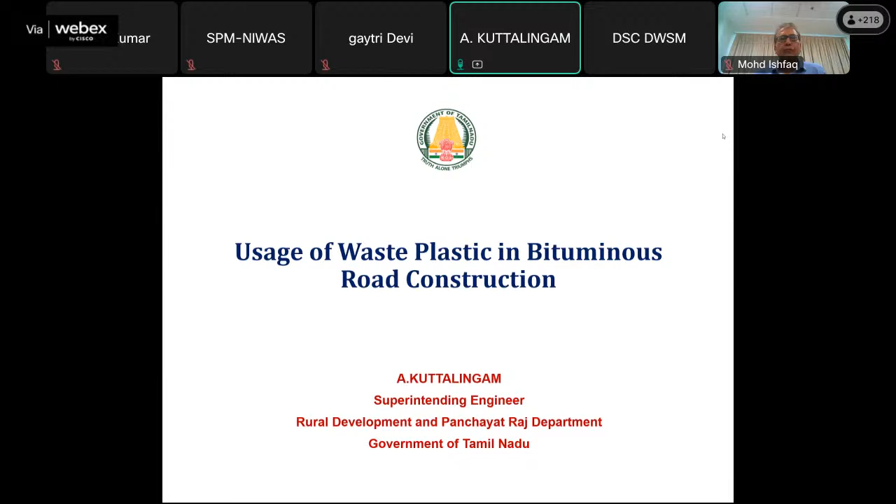You can run the PPT from here if he's facing problem. Yes, it should start, sir, immediately. Then you can run the PPT, sir. No issue, sir. Vinay, you have the PPT, you can run it. I think he's facing some issues with that. No issue, sir. Okay, please run it. Yes, sorry sir, it's running now.

Nowadays we are facing the problem because of plastic waste, because we are mostly using all kinds of plastics, but how to handle it is the challenge for us. Currently in India, the total plastic waste generation is around 9.4 million tons per annum, out of which 26,000 tons of waste plastics are generated per day. Around 7,800 tons of plastics are a challenge for the environment that we have to make for another use.

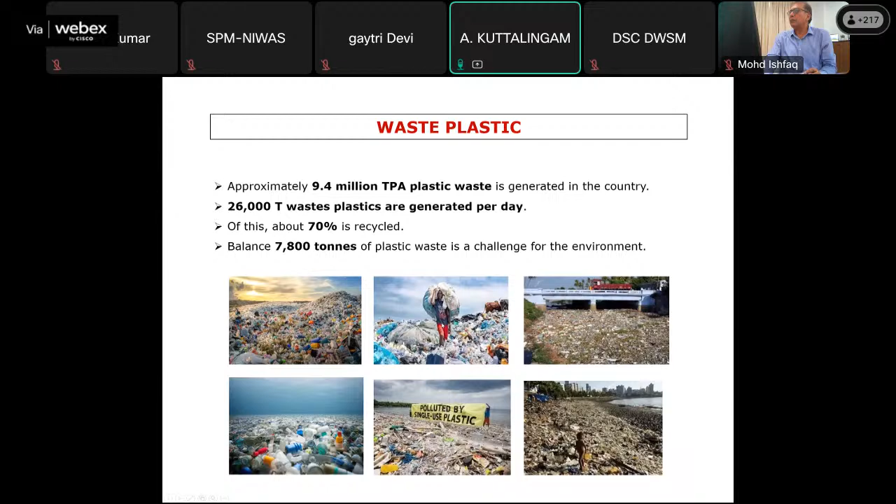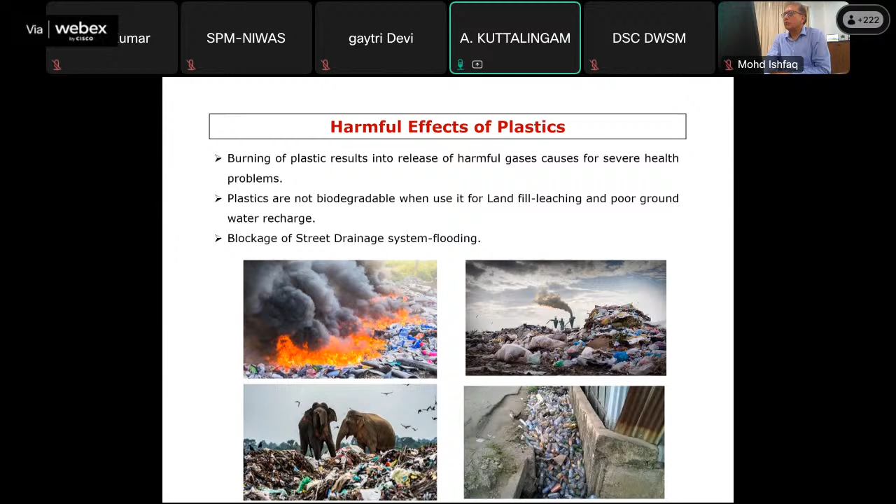These are the problems because of plastic. Nowadays we are throwing all the plastic away, so sanitation workers collect and dump it wherever lands are available. So when we burn it, carbon emission will happen, air pollution will happen, and land pollution will happen, and animals will eat it and it becomes a problem for their life. When they throw it away, it will block the drainages, so during monsoon season some flooding will happen due to the blocking of the drainages.

In Tamil Nadu, our department has set up the SBM in a good profile. Total rural population is around 4.69 crore, 37 districts, 388 blocks, 12,525 panchayats, and around 79,000 habitations. So in our state, the SBM wing is functioning well.

As per present SBM norms, there is a provision for establishing plastic waste management units at rural areas. Currently, out of 388 blocks, we have established around 322 plastic waste management units.

As per SBM guidelines, there is a funding provision of up to 16 lakhs that can be spent out of the SBM-G funding. From SBM-G, we have established some micro composting centers. In the micro composting center, we induce the wet waste to compost, so that we can process it and convert it into compost for agriculture and other purposes.

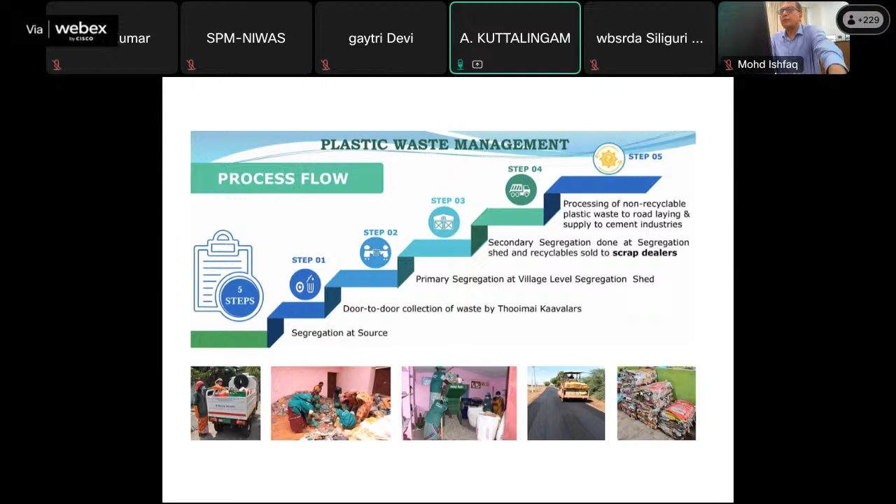For plastic waste management, initially we have the Thooimai Kaavalars, the door-to-door collectors. The Thooimai Kaavalars are paid around 5,000 rupees monthly. They go and collect door-to-door, segregating from the doorstep itself. Even then, some challenges are faced by the sanitary workers. They bring it to the segregation shed and segregate the entire thing, then use it for another plastic waste management unit.

There are machines we have purchased, and from those machines we process it for recyclable and other usages.

So in plastic waste, there are 7 types of plastic. Polyethylene PET, having a melting temperature of around 250 to 260 degrees. High density polyethylene HDPE has melting temperature of around 120 to 130 degrees centigrade. PVC has melting temperature around 100 to 260 degrees. Low density polyethylene, LDPE, has melting temperature of 105 to 115. Polypropylene's melting temperature is around 130 to 171. Polystyrene PS has a melting temperature of 210 to 240.

So which kind of plastic can be used or recycled? Based on the property of each kind of plastic, that is the matter we have to understand before going for recycling or reprocessing. That is the important thing. Based on that, during segregation, we have to create awareness among the sanitary workers to segregate the waste plastic accordingly, so that it can be appropriately used for recycling or reprocessing.

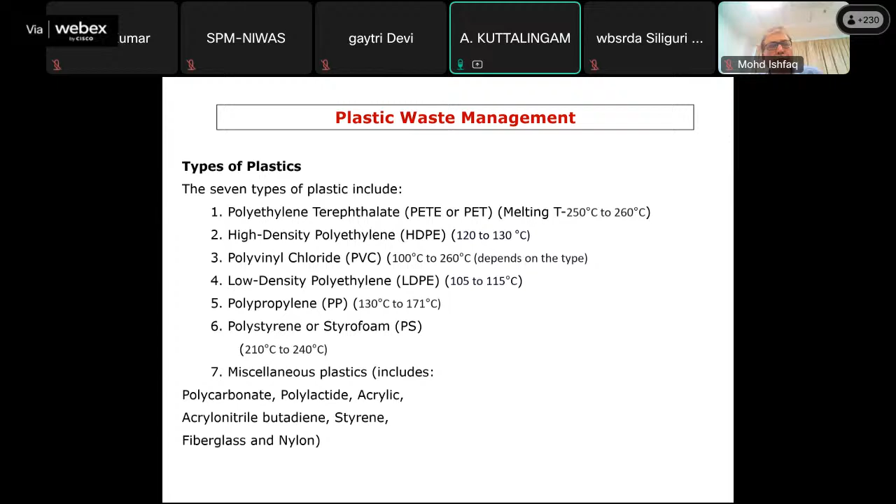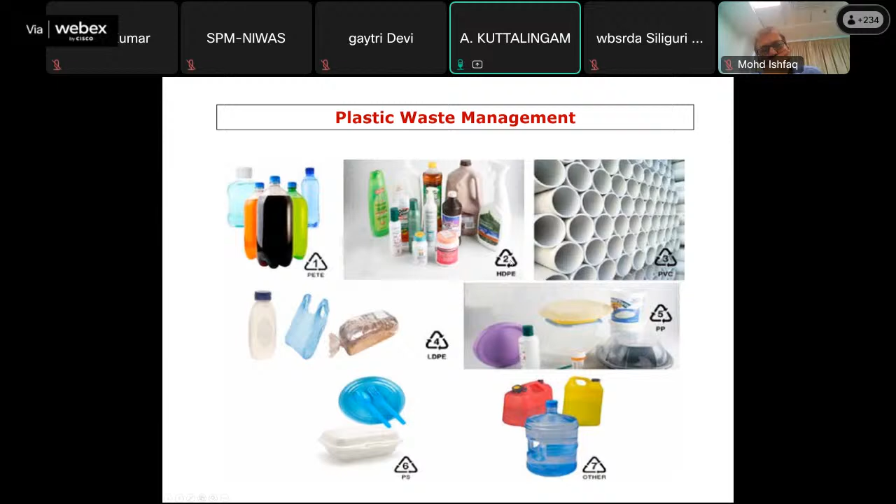So these are the plastic wastes, the images showing PET and other things. For road construction, we can only use LDPE and HDPE. Mostly in Tamil Nadu, HDPE is not used because segregation is very difficult, so we are using only LDPE. LDPE is nothing but plastic - examples are plastic wrapper and carry bag, sandwich bag, bread bag, bubble wrapper, garbage bag, grocery bag, and beverage cups. These all come under LDPE.

And HDPE - plastic bottles, milk jugs, shampoo bottles, bleach bottles, cutting boards, and piping. These kinds of things are very difficult to shred, so we are not using this kind of plastic for road construction. Only LDPE we are using. So for LDPE, there is a guideline in the IRC manual.

So there are 2 kinds of processes by which we can reuse waste plastic. One is the features - there is a rule called the Plastic Waste Management Rule 2016.

In that, the waste generator has the responsibility to segregate waste plastic and hand it over to the authorized agency, that is the sanitary worker, and to pay the user fees for processing all the waste. The local body shall have the responsibility for setting up plastic waste management, which is eligible under SBMG guidelines, and encourage the use of plastic waste for road construction, energy recovery, waste to oil, or other co-processing in the cement kiln unit. So these are the processes available.

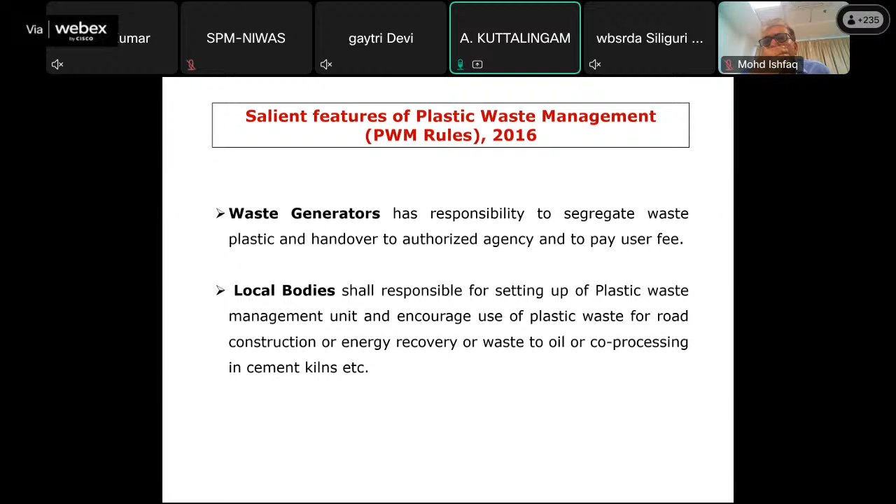As per SBMG, there is a provision for 16 lakh. Funds can be utilized from the SBMG guidelines. We can establish units wherever waste plastics are coming in more, and use it for other kinds of reprocessing. The plastic waste collected by the Thooimai Kaavalar and sanitary worker SHG members is segregated and weighed and used for this.

In Tamil Nadu, we have piloted a plastic buyback policy in a few select panchayats, with the interest of the panchayat and the panchayat sarpanch. They introduced that if people segregate and collect the plastic waste and bring it to the plastic waste management unit, they will get around 10 rupees for it. So by this way, we are encouraging people to segregate all kinds of plastic waste. Now we are processing to escalate this into entire Tamil Nadu. That initiation has been taken.

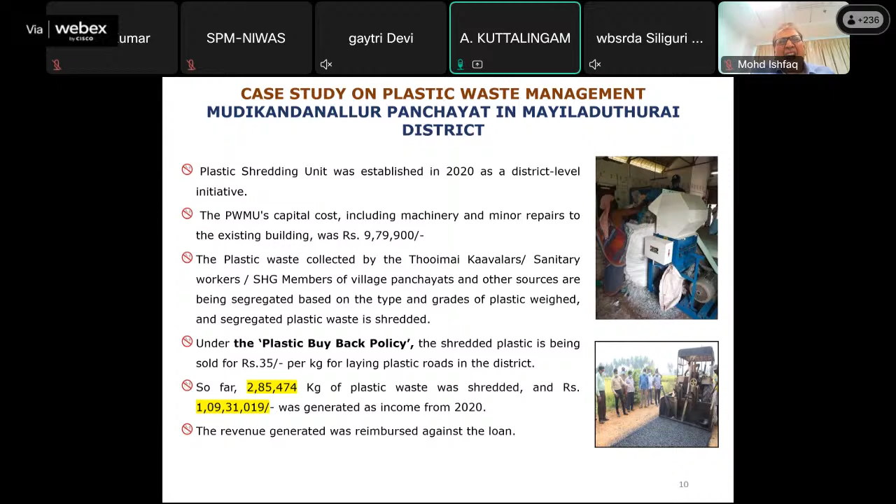So slowly we are inculcating the habit of segregating waste plastic and handling plastic waste at the household level and at the community level itself. So far, since 2020, we have established many plastic waste management units. Around 285 metric tons of plastic waste has been shredded in these units, from which they have generated around 1 crore in money. This money has been reimbursed for the loan for establishing the plastic waste management unit, over and above the 16 lakh, by the SHG members, and they will earn other income from that.

These are the kind of machines: the plastic shredder, having the capacity of around 100 to 125 kg per hour, costs about 5.4 lakhs. And a dust remover, because normally we throw away plastic in the open area, so it will mingle with dust, sand and other things, so it has to be removed.

As per IRC guidelines, only less than 1% dust is allowed for use in road construction. So to enable that, we have to remove all dust from the plastic waste collected from the local area. So the dust remover machinery has been established in the plastic waste management unit.

Another baling unit is used where other kinds of plastic cannot be used for road construction. They shrink the volume of that plastic, tag it, and give it to the cement kiln industries. There's also a weighing balance, essential for buying and selling. All this equipment can be purchased within the allowable amount of 16 lakhs.

So every district can establish one plastic waste management unit with the help of this SBM-G facility. So it will slowly...

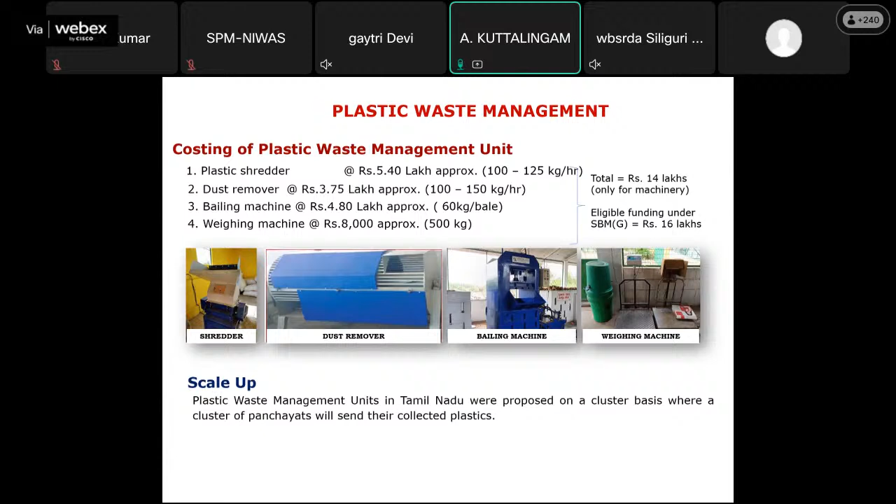Similarly, in rural areas also we are initiating this. So now people are slowly being educated that plastic waste has to be properly disposed of. They segregate it in the household itself and give it to the sanitary worker on a weekly basis.

Currently, around 322 plastic waste management units have been established, along with a buyback policy and other things. So far, we have established this.

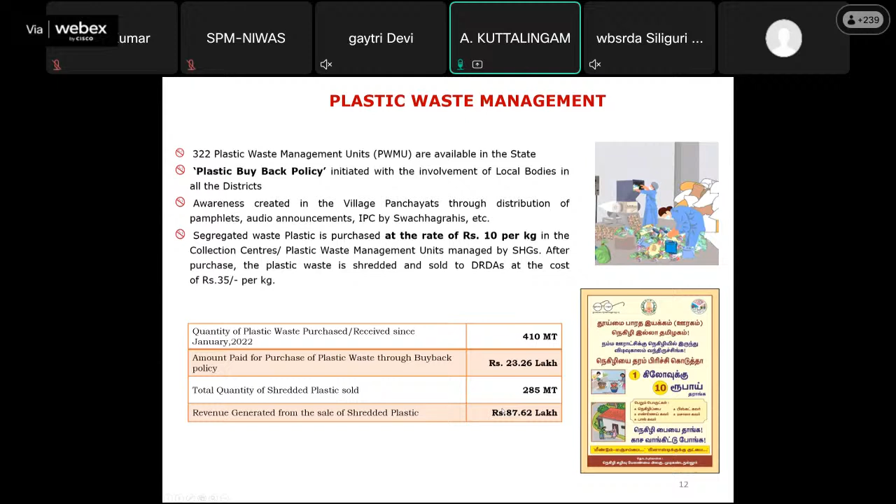For the LDPE plastic waste, the initiation to use it into road construction happened during 2002 itself, by Professor Dr. Vasudevan from Thiyagarajar College of Engineering. He is a pioneer for this plastic waste into road construction technology. At that time he decided, and on a pilot basis, initiated the process.

At that time, around 10% of the weight of the bitumen was replaced by plastic waste. So they used around 10%, and by experiencing that up to 2012, we were escalating the use of plastic waste in road construction in a piecemeal manner. Based on studies, the IRC conducted several studies from all over the country, including Tamil Nadu, and during 2013 they released a code for road construction using waste plastic.

PVC and these kinds of plastic should not be used because their melting temperature is more than the aggregate heating temperature, so it cannot be used.

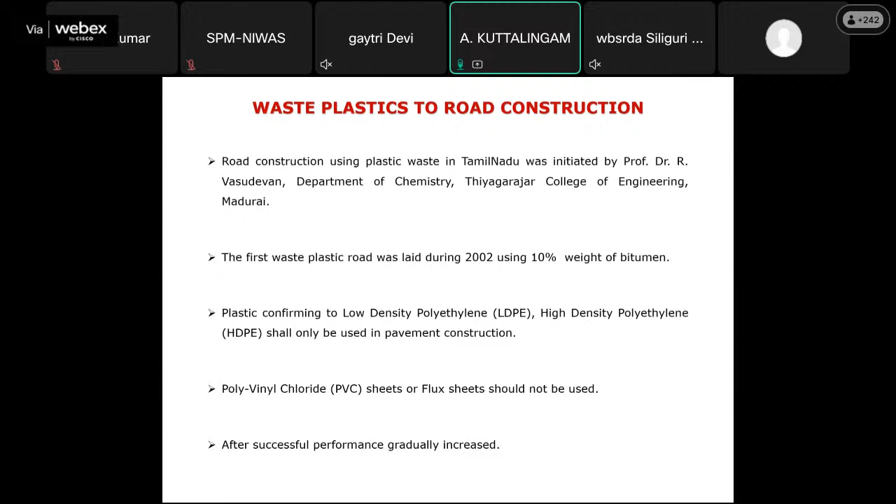During 2013, the IRC released guidelines for the use of waste plastic in bituminous road construction as a dry process. There are two processes available: dry process and wet process. For the wet process, study is going on, but it is not yet finalized.

So as per the IRC code that is available, the IRC did so many trials and errors. So now we are inculcating the use of waste plastic for road construction using only the dry process.

As per road construction requirements, this LDPE waste plastic has to have all dust removed, and it has to be shredded in the shredding machine, into a size of 2.36 mm down to 600 micron size. So the plastic has to be shredded into this size.

This size is essential because we use 20 mm metal and less for road construction. If the plastic is shredded to a larger size, it will not mingle well with the entire piece and part of the metal. So the IRC has recommended only 2.36 mm to 600 micron size of plastic, and the machine is equipped for that.

The shredded plastic from the shredding machine comes out around this size, and dust and impurities should not be there, because we are using bitumen. When dust and other impurities are more than 1%, it affects the binding property and viscosity of the bitumen, so the quality of road construction will be defeated. For that reason, the IRC recommends that dust should not be more than 1%, and for that purpose we use the dust remover in the plastic waste management unit.

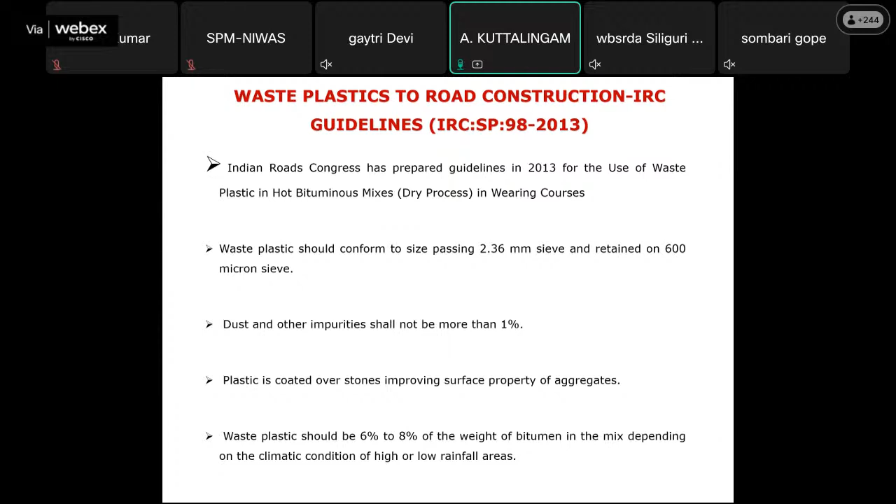of the bituminous road. As per IRC, it is recommended that 6 to 8%. Initially on trial, we were using only 10% of the waste plastic for which the bitumen is used. So currently, as per IRC, after various trial and error, they have suggested 6 to 8%. Currently, we are using around 7 to 8% in our road construction. In Tamil Nadu, we are using 6% and 8% according to the rainfall of the locality where the road is to be constructed. As I said, there are two processes, dry process and wet process.

Dry process is the cheaper one because we can directly heat the plastic along with the heated aggregate. It will coat over it. For wet process, any kind of plastic can be used. In that, one negative thing is there. When you use different varieties of plastic for wet process, each variety of plastic will have a different melting temperature.

So when the bitumen is heated to 170 degrees, at that time some plastic will burn. By that way carbon emission will happen, and again the environment will be polluted. And this kind of wet process has another property: the expense is more. So we are not recommending the wet process as of now.

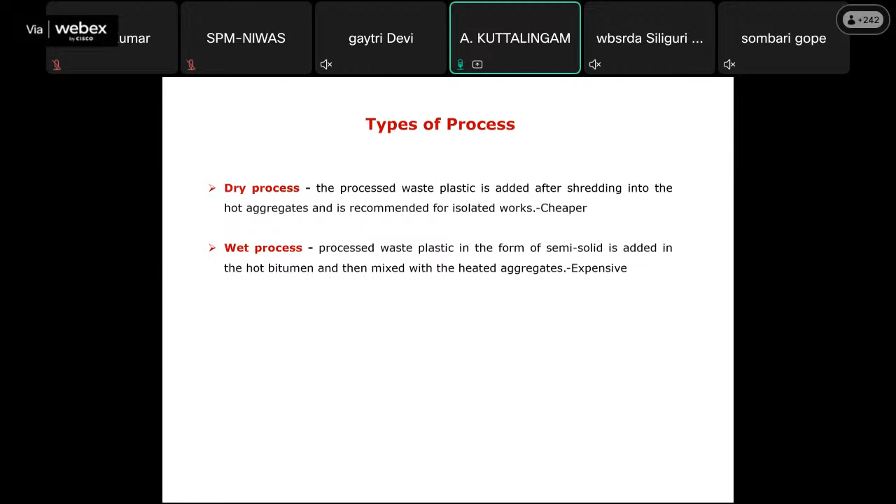So whenever road construction starts, in our Tamil Nadu, we have issued an SOP and circular that for every road construction, wherever there is a provision for use of waste plastic, the contractor has to buy the shredded waste plastic only from the plastic waste management unit established in the government center where the SHG is running it. So by this circular, we are encouraging the involvement of the SHG to put a dedicated effort for the successful implementation of this process.

So the shredded plastic is mixed with the heated aggregate. The heated aggregate will have a temperature of around 160 to 170 degrees. At that time, we are using LDPE. LDPE has a melting temperature of around 105 to 130 degrees. So when the shredded plastic is placed over the heated aggregate, it will immediately melt and coat over the aggregate.

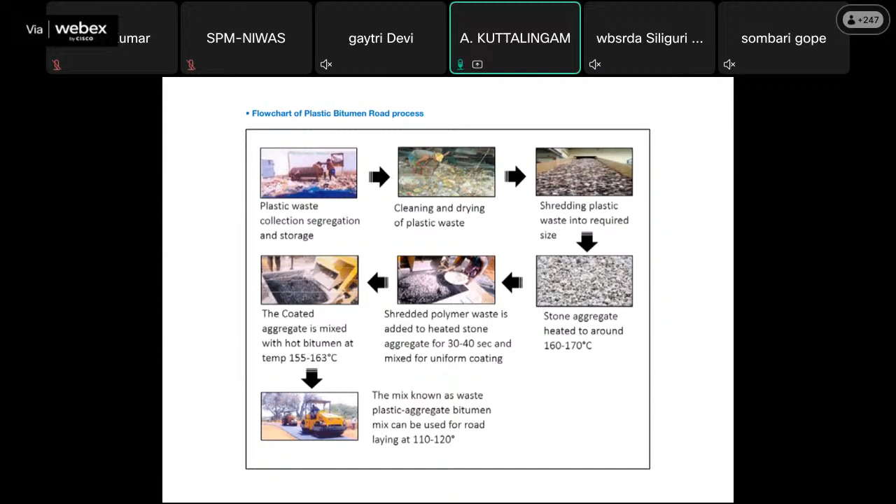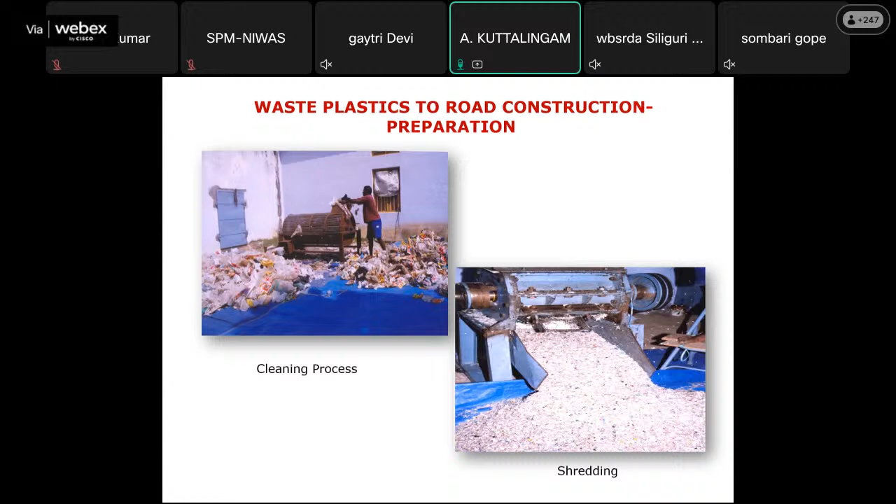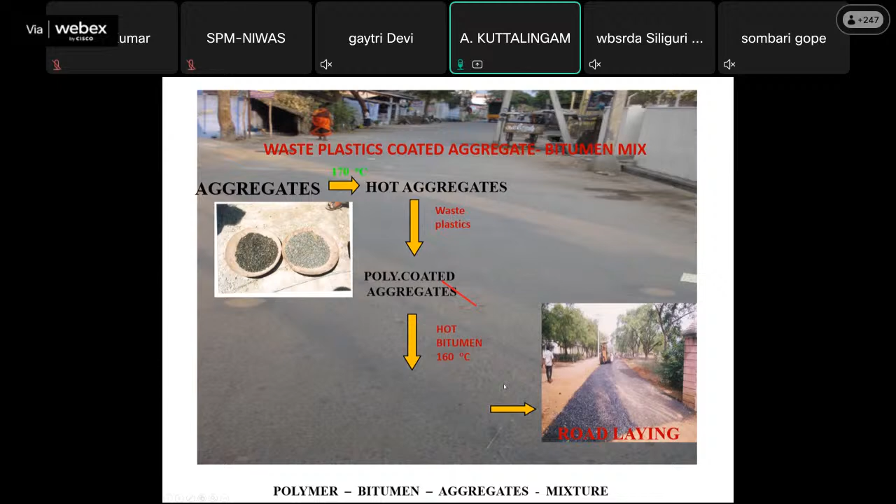Normally in earlier days, our contractors used to do road construction using the mini hot mix plant and hot mix plant. In that hot mix plant, it is very easy to take up the process of waste plastic. Nowadays, most of the contractors are big contractors, and they are shifting to the central mixing plant. There we are having some other problems.

So in the hot mix plant, initially, on a percentage basis, we will pour the metal into the chamber cylinder where the flame is blown over the metal and it is automatically heated. When the metal is heated to a temperature of 160 to 170 degrees, it will come out of the flame and we will place the waste plastic into that drum.

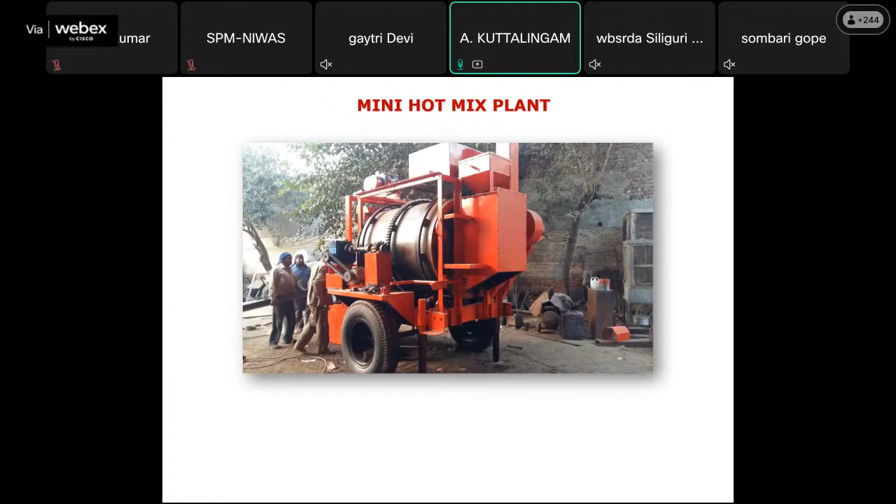So it will automatically melt and coat over the aggregate, and then the heated bitumen is added over the plastic coated aggregate. So the mix preparation is ready, and then it is transferred to be placed on the road. These are the mini hot mix plants.

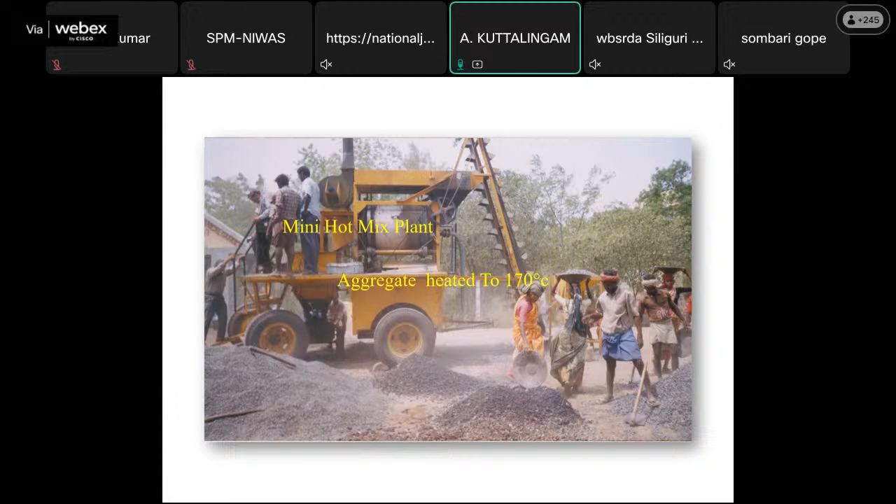You can see the local labourers. They are putting it on a batch basis. They have some formula, and based on that, they add that many pounds of metal and plastic. They are trained accordingly for this purpose. This is the process. By that way, we are using 8% of plastic for replacing the bitumen.

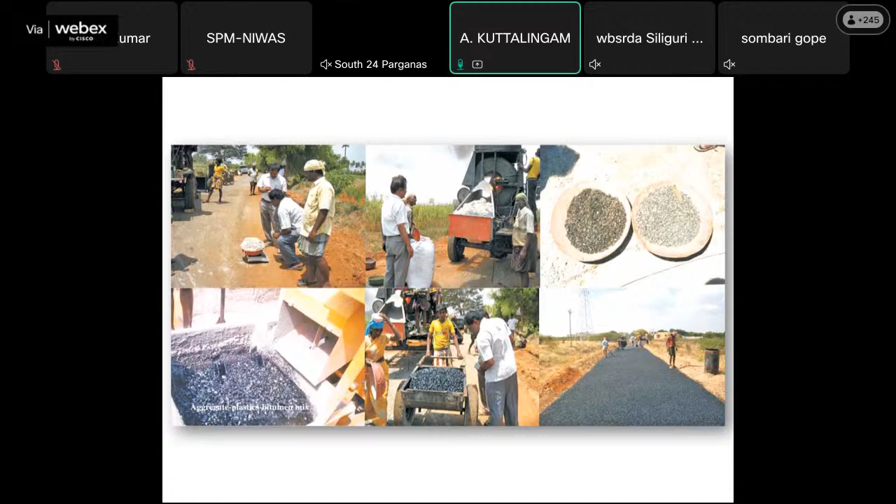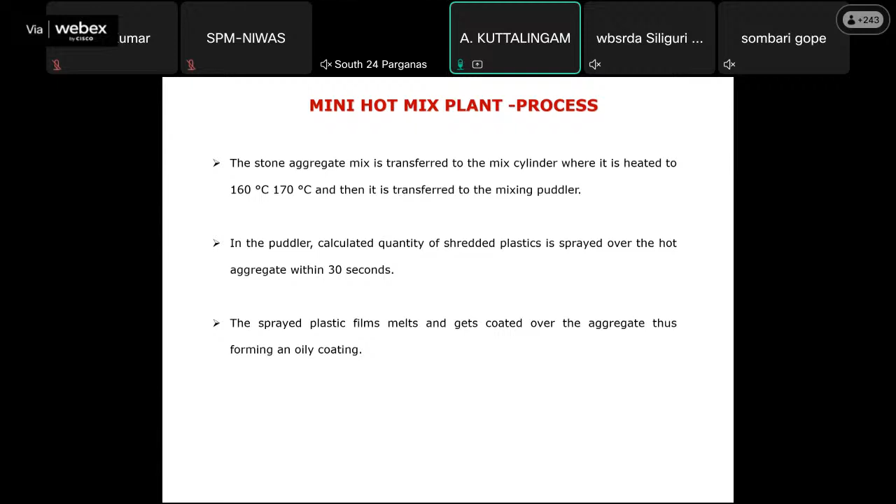These are the heated aggregates transferred into the puddling chamber. In the puddling chamber, the heated aggregate is at a temperature of around 160 to 170 degrees, and the shredded plastic is added to the heated aggregate. It mixes for around 30 seconds, and then immediately it coats over the aggregate. Here is the process of adding the plastic over the heated aggregate. This is the coated aggregate.

We can see the color difference when the melted waste plastic is coated over the aggregate. When we add it, water will not percolate into the pores of the metal. That is the main important thing. In the rainy season or in snowfall areas, normally the water will percolate into the pores of the metal, and in the winter season it will freeze, and in the hot season it will melt. This kind of thing strips the bonding of the bitumen road.

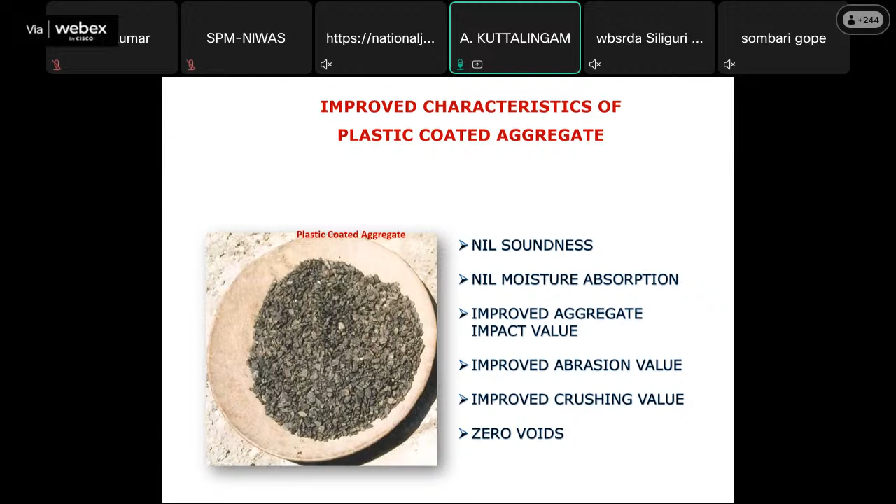So for avoiding that, this plastic coated aggregate helps in arresting the stripping of the bituminous road. The plastic coated aggregate has the advantageous properties of nil soundness and nil moisture absorption, and the aggregate impact value will also improve, as well as abrasion and crushing value, and zero voids. Zero voids is essential for bituminous road construction.

In the mini hot mix plant, the bitumen is normally heated to a temperature of 155 to 163 degrees centigrade. Beyond that, when we heat it, it will burn, and carbon emission will happen. So the bitumen should not be heated to more than 160 degrees centigrade. That is the main thing. For that reason, we are avoiding HDPE and other kinds of plastic whose melting temperature is higher than that. Because of that, we are mostly using LDPE waste plastic.

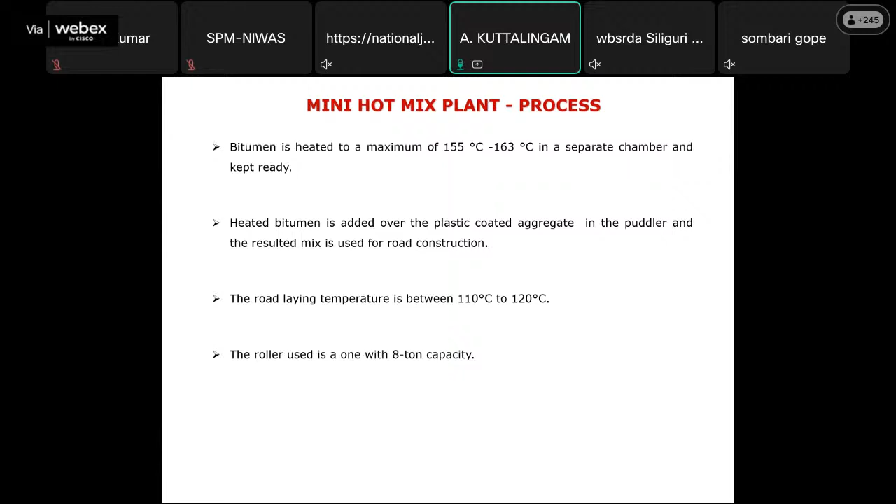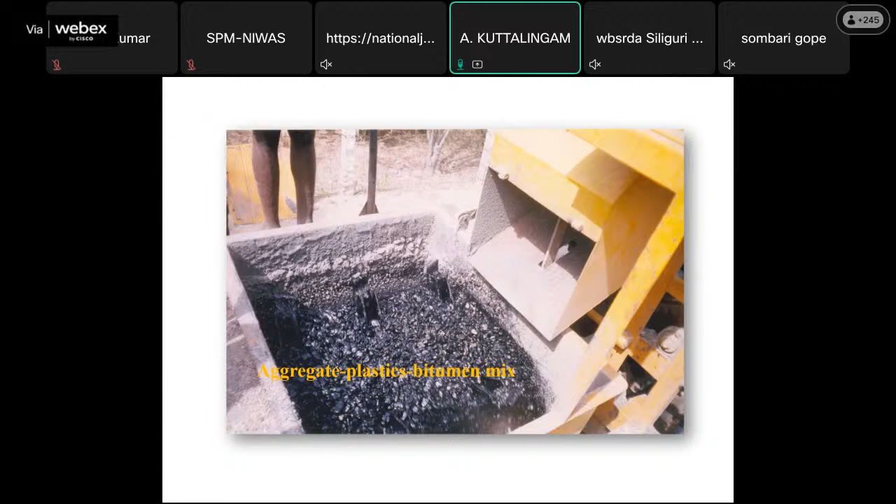The plastic coated aggregate is mixed with the bitumen in the puddler chamber, and it is transported to the road area, and they will immediately compact it.

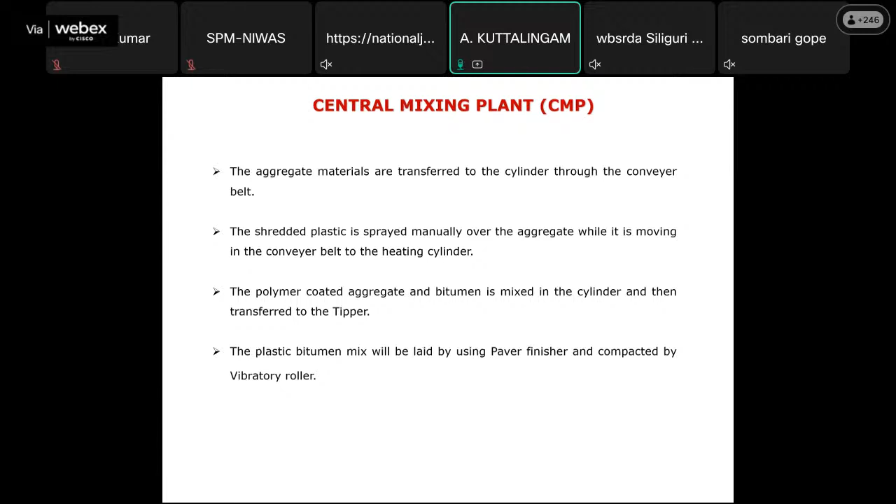So initially, when it was flowing over the conveyor belt to the heating chamber, we placed the plastic waste in the lower portion. When we add the plastic in the initial chamber, the hot flame is in the first chamber. These plastics have a melting temperature of around 110 to 120 degrees centigrade. When it contacts the flame, it will immediately burn. It will not coat over the aggregate.

So based on the negative thing faced in the central mixing plant, we have suggested the contractor make another provision of adding the plastic into the third chamber. This heating chamber will have four compartments. Initially, the flame will flow in the first chamber, where the metal will flow and mix with the heat, and the metal is heated. Then in the second chamber, the flame will be a little reduced, and in the third chamber, only heated metal will come out.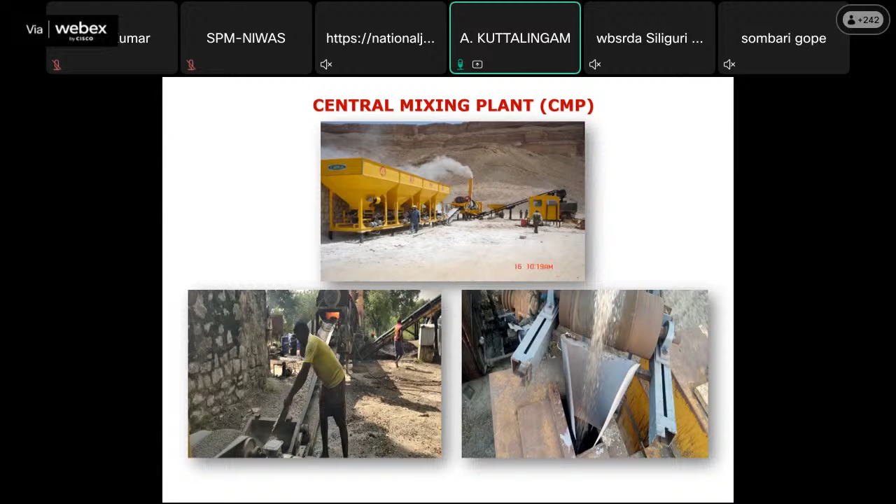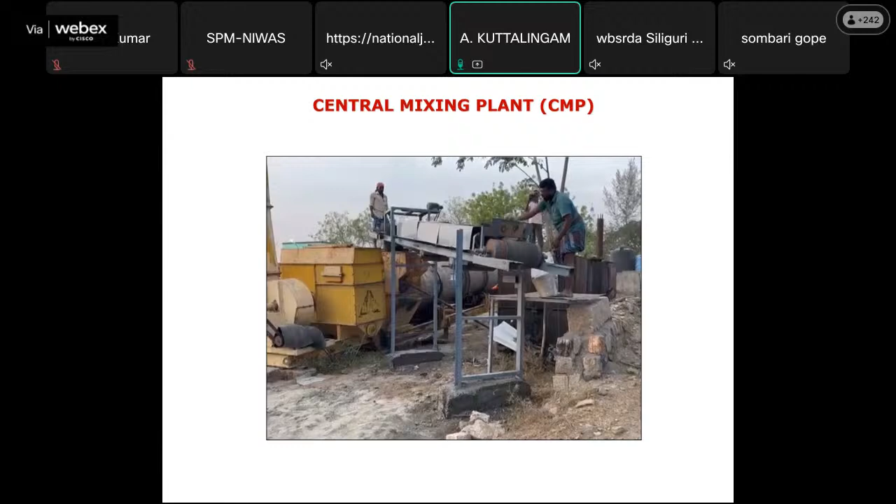So nowadays most of the contractors are providing these facilities in their central mixing plant. This is one kind of process in the central mixing plant located in Virudhunagar district. Various studies have been done by the local engineers, and based on that, they have now developed a better situation. I will show one video later. This is the normal central mixing plant. The entire thing will be spread over the road through a paver machine, so the road finish will be smooth. So nowadays we are encouraging the contractor to do the road with the paver machine.

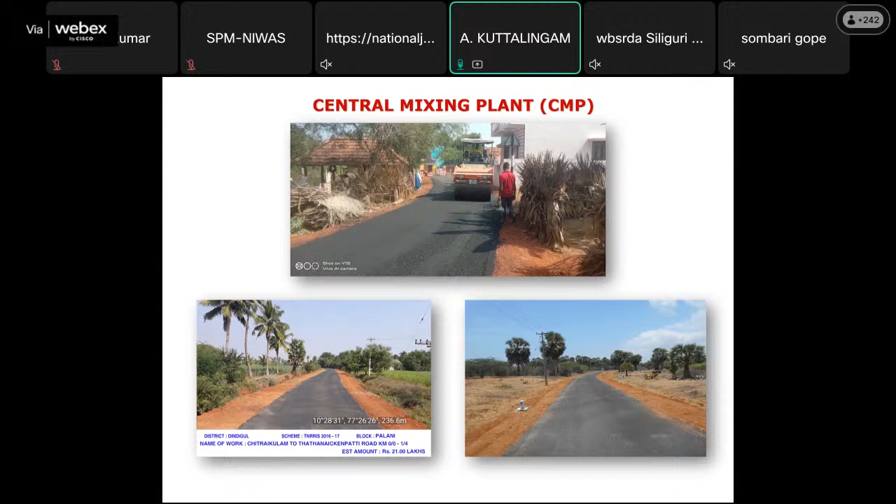When we use waste plastic in road construction, the properties of the metal and road are improved. The Marshall stability value, that is strength, is more when plastic is added compared to the ordinary road, the binding property is far better, the softening point is less, and the penetration value is more. Tensile strength is high, and rutting is less. No stripping will happen, and seepage of water will not happen, because all voids of the metal will be clogged with the melted plastic, and durability of the road is better compared to the ordinary road.

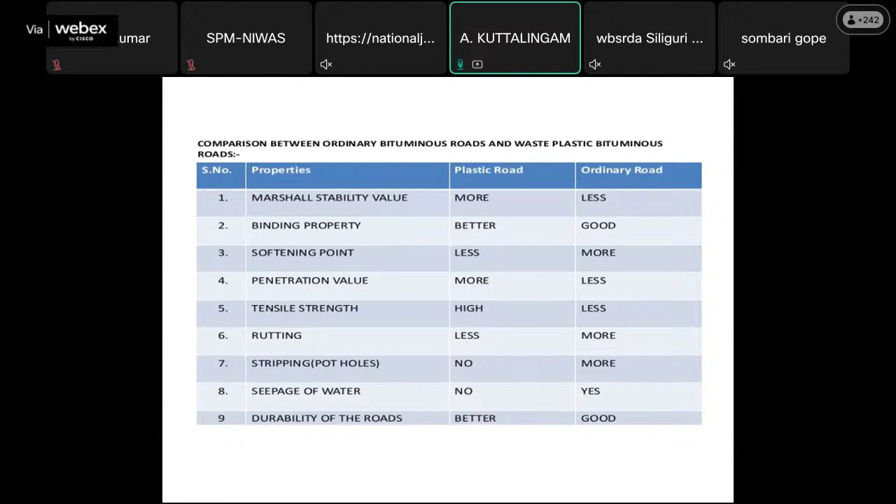Because of these benefits, we are encouraging the local people and contractors to use more waste plastic. That way, we are reducing environmental pollution. Nowadays, IRC in 2019 has issued another modification in their IRC code. Now MoRTH also has incorporated in their circular that wherever roads are constructed in the peri-urban area with population more than 500,000, these roads should be laid with waste plastic. This is the recent guideline issued by MoRTH for the NHAI and main highway engineers.

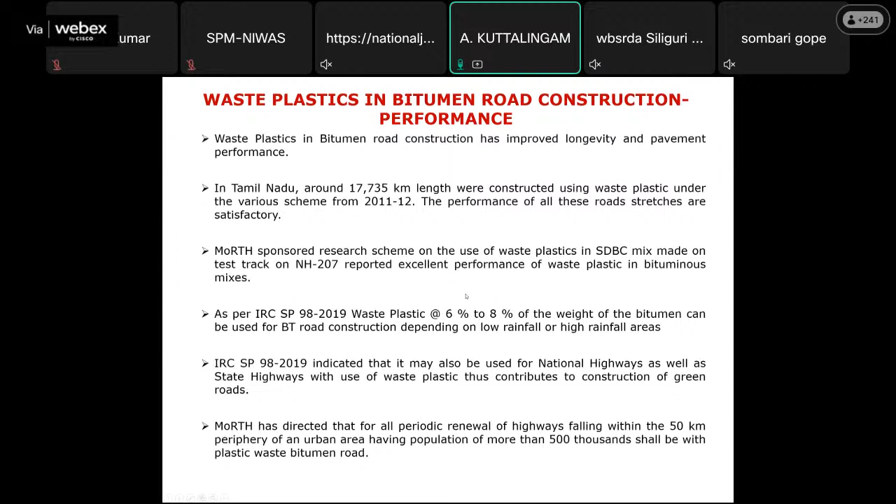In Tamil Nadu, we are doing all PMGSY and rural roads by the Rural Development Department, so we are dealing with the lower category roads. The higher category roads, as per NHAI, they are doing with waste plastic. So far, from 2011-12 onwards, around 17,000 kilometers of road have been constructed, and most of the roads are performing well compared to the normal ones.

These are examples of roads constructed earlier during the pilot season and after. The first road was laid during 2002, and the photo was taken in 2008. After six years, there is no pothole, no cracking, no deformation, and no edge flaw. Still, the road looks like a newly constructed road. And in Erode, the road was completed in 2003. After five years, the road is showing very good performance.

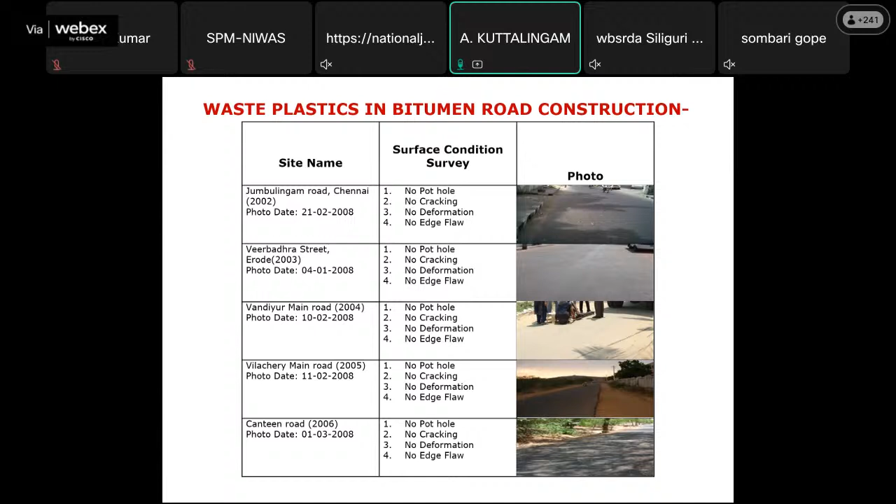And in Madurai also, these are the examples of the usage of waste plastic. The only thing is we have to do it in a proper way. That is the main thing. We have to study how it is performing, and it has to be done in the field. That training has to happen. Then only it will be very useful for the road engineers.

In Tamil Nadu, from around 2011-12 onwards, every year, as per our state guidelines, we are normally giving a target for road construction using waste plastic. Currently, under our state chief minister's road construction program, we have taken around 10,000 kilometers for road construction. Out of that, 1,500 kilometers of road has to be laid with the use of waste plastic. That instruction has been clearly given, and district-wise targets have been given, so that in every district plastic waste management will be encouraged and utilized for a better purpose and for the environment also.

And this circular is a minister's announcement in the assembly. 1,500 kilometer length of road will be constructed using waste plastic technology under Mudalvarin Grama Salaigal Membattu Thittam. Through this, around 500 metric tons of plastic will be used for the road.

Currently, based on the bitumen rate, we are using 438 kg of plastic for a 1 kilometer road having a 3.75 meter width. And we are saving around 3,713 rupees per kilometer, because nowadays the waste plastic cost and the bitumen cost are more or less equal, or bitumen is slightly more than the plastic. Because of that the cost difference is less. We are not dependent on cost difference and cost economy. We are in a position to use the waste plastic in a proper way, and by that way we are protecting the environment. This is our motto. So we are encouraging use of waste plastic in road construction.

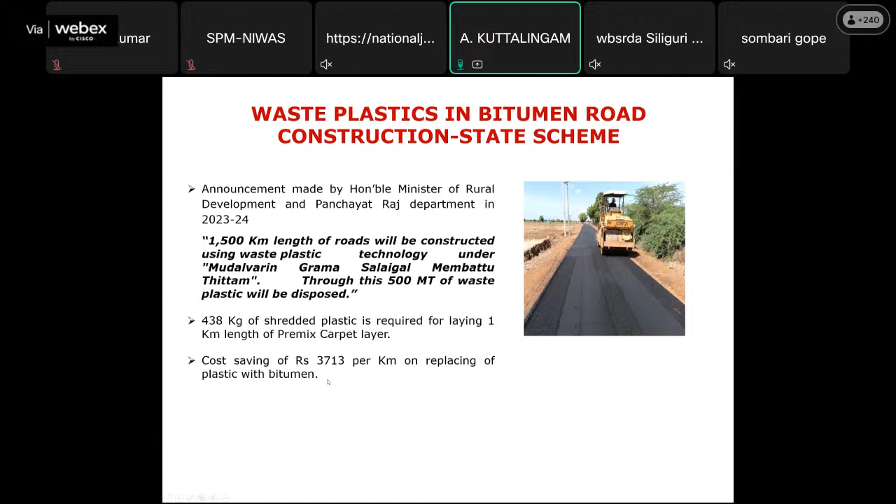These are the roads constructed under our state Mudalvarin Grama Salaigal Thittam in various districts. Recently constructed, around 1 year old.

And as per the new technology guidelines issued under PMGSY, there is a Vision 2022 new technology guideline. In that, around 70% of the proposed length should be executed with the use of waste plastic by dry process. So based on those guidelines, recently we have got sanction of around 2,800 kilometers. Out of 2,800 kilometers, we have proposed around 2,153 kilometers for road laying using waste plastic. So by this way we are protecting the environment and also encouraging the SHGs to run the plastic waste management units enthusiastically. This is the good thing happening in Tamil Nadu.

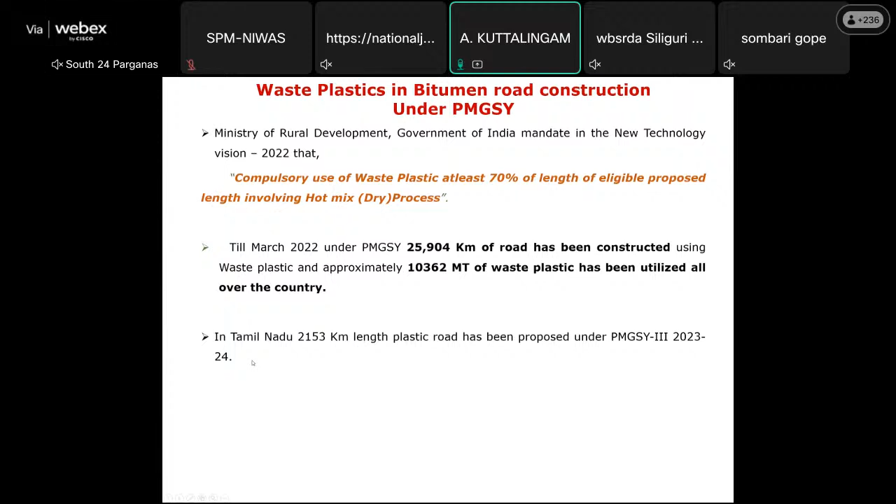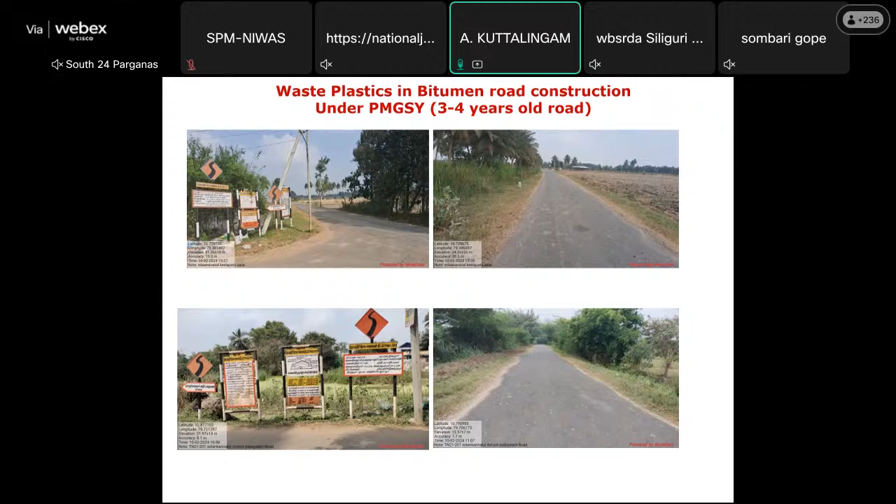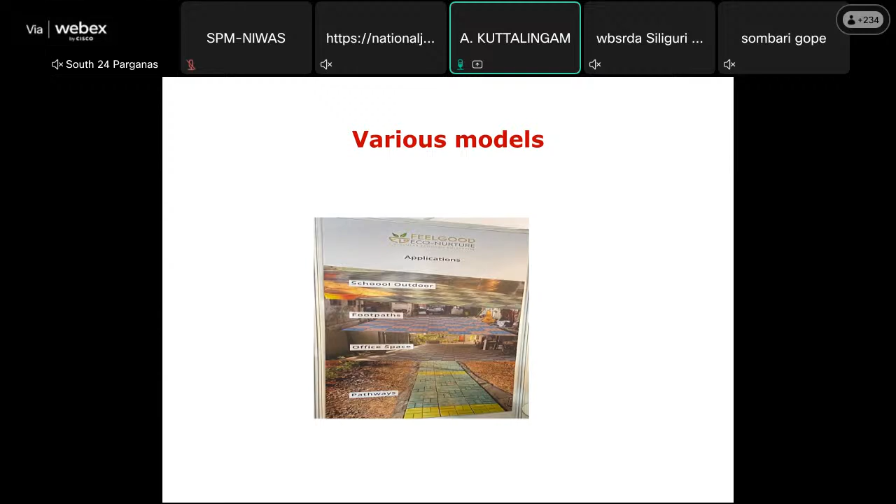And recycling plastic into durable products can also be taken up in another way. HDPE pipe and other kinds of waste plastic can be used for durable paver blocks and other kinds of solid blocks for ornamental purposes, for compound walls and other construction. These are in the study period. We are planning to do this kind of thing using waste plastic which cannot be used in road construction, so it can be used for other kinds of products. That initiative we have now taken. These are the paver blocks prepared using waste plastic. This is another kind of use of waste plastic.

And one important thing: let us understand the importance of waste plastic and good corporate culture. That means we have to properly dispose of the waste plastic. By that way, let us make the environment clean. Do not litter plastic on the road, but use it for road construction. That is the final thought I have to tell.

So I think my presentation was too fast. Maybe it will be more understandable because of the pictures. I will show one video also. Video and photos.

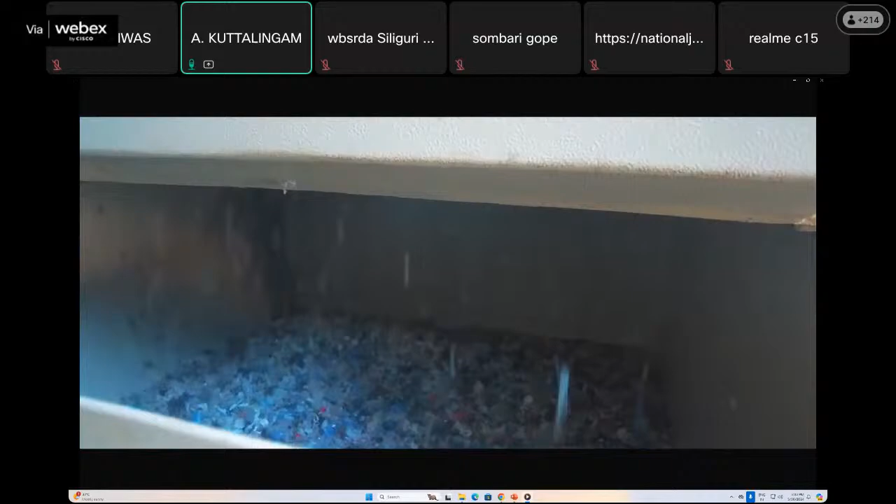This is the plastic waste management unit where still some segregation has happened, and now they are doing the shredding. This is the baling machine.

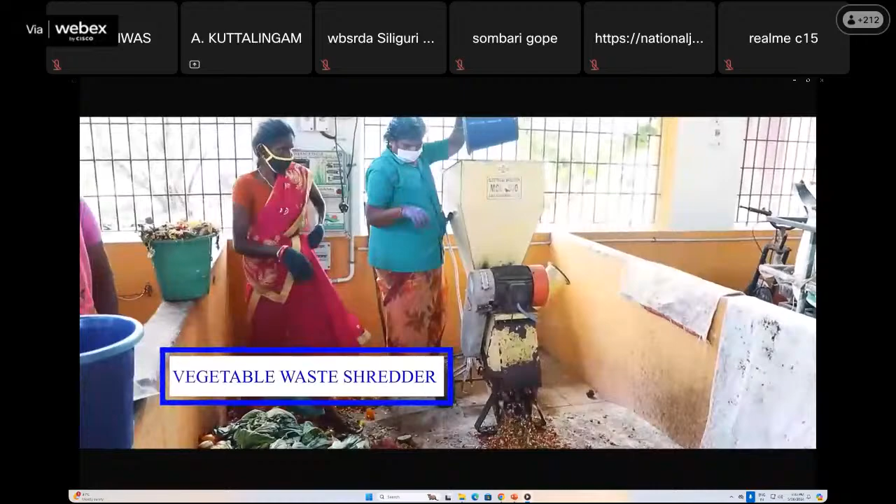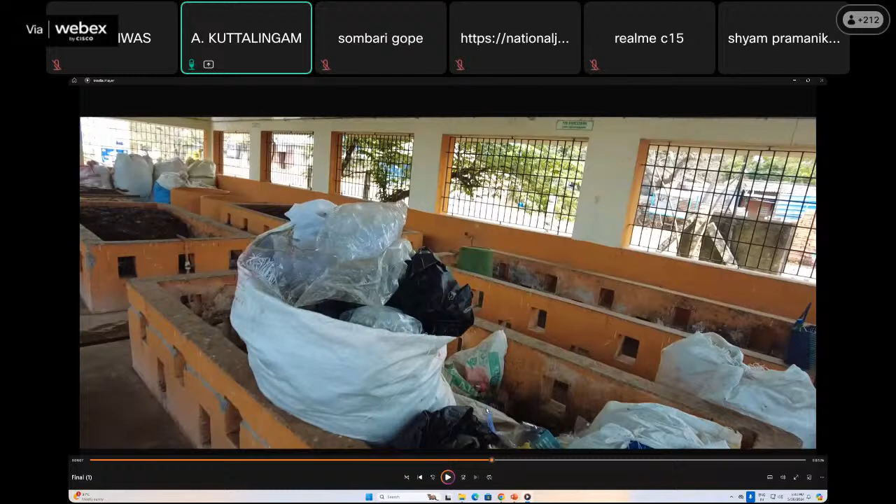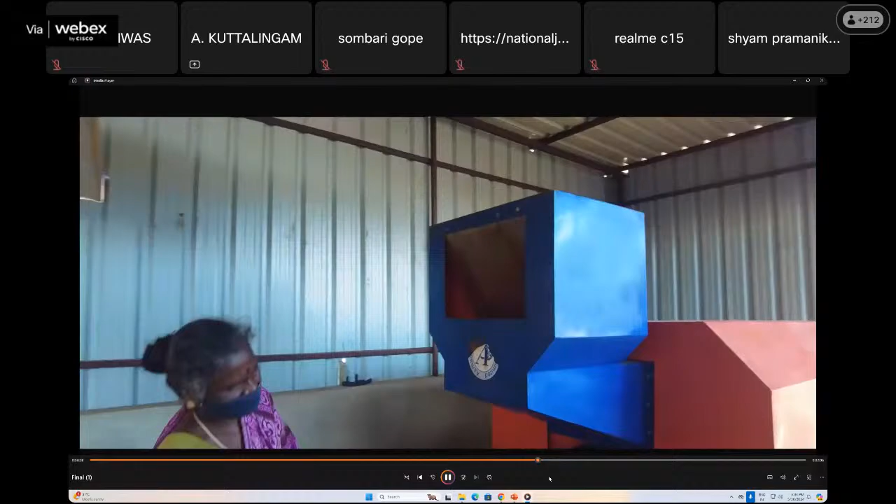This is the micro composting center where all the wet waste is processed by adding EM solution, that is, effective microorganism solution. By that way we are converting the wet waste into compost within 45 days. The EM solution is prepared by the SHG members themselves. The dust remover.

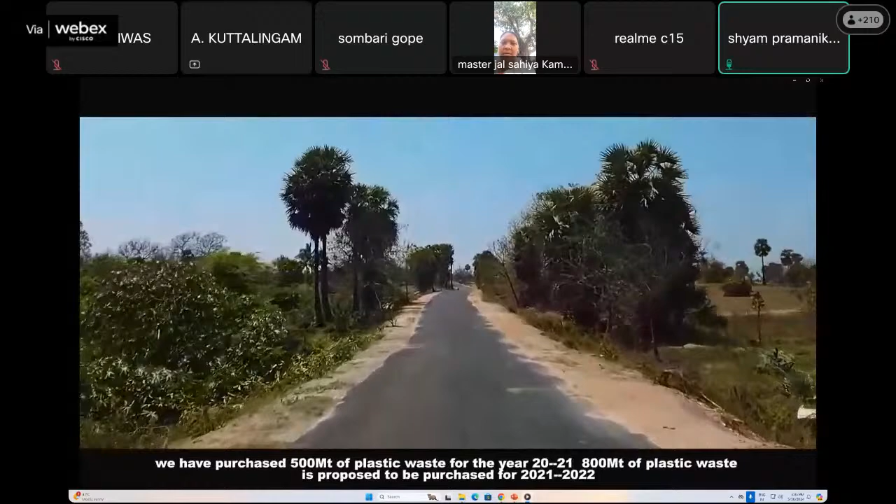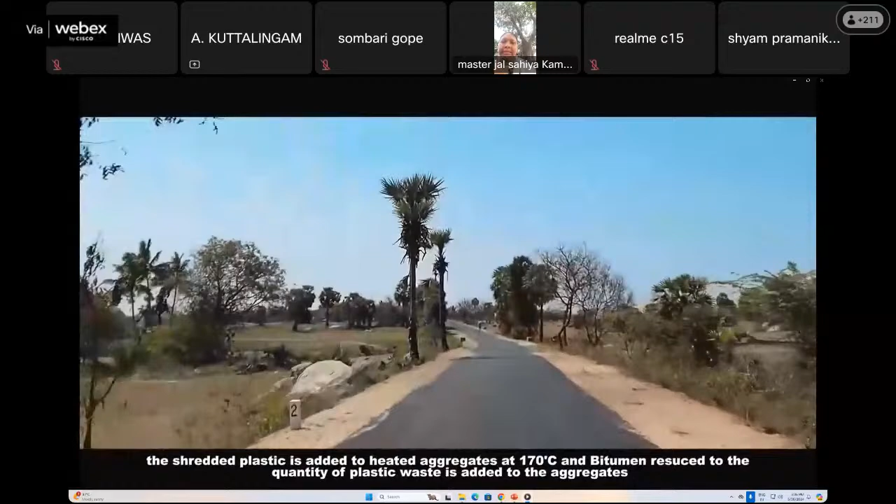This road has been laid using waste plastic under the state scheme. Okay. Yes, sir. Thank you, sir.

Any questions? Yeah, can I come in over here? Yes, please. Sir, first of all, thank you very much for your presentation. I just would like to raise one issue.

When this shredded plastic is added onto the heated metal at around 170 degrees centigrade, there might be chances of the plastic being burned. If that happens, some gas may be evolved, and that gas might be quite unhealthy. So what sort of precautions are being taken to address these issues?